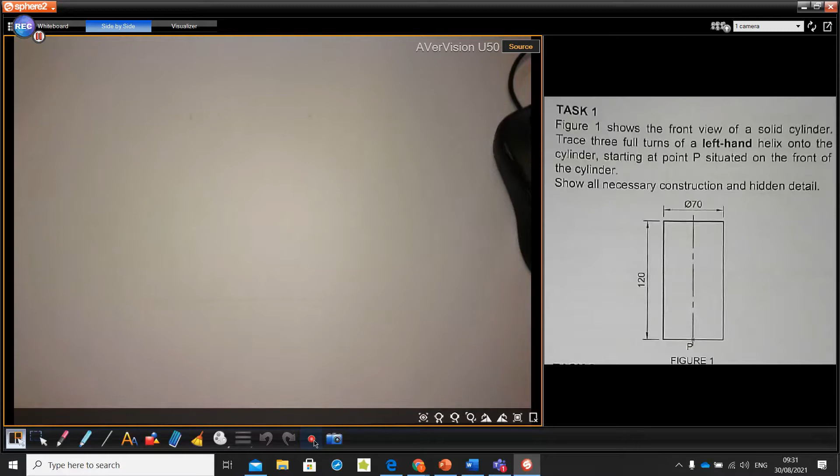Figure 1 shows the front view of a solid cylinder. Trace 3 full turns of a left-hand helix onto the cylinder, starting at point P, situated on the front of the cylinder. Show all necessary construction and hidden detail.

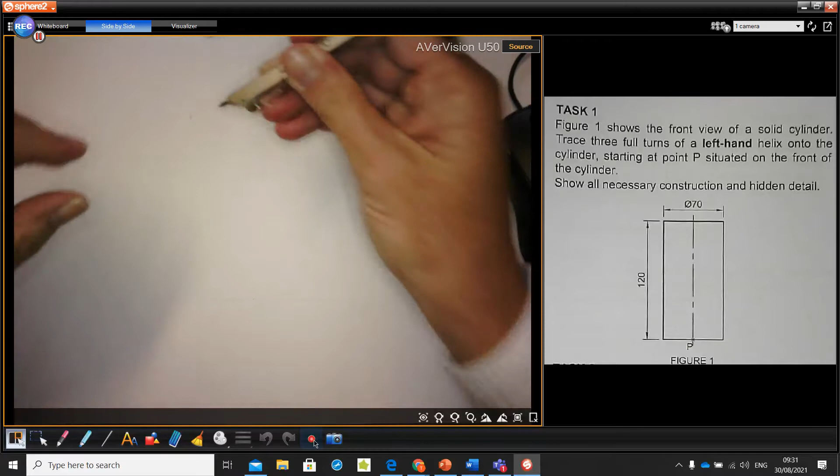The first thing you're going to do is draw the top view of your cylinder and divide it into 12 equal parts, making sure to include your center lines.

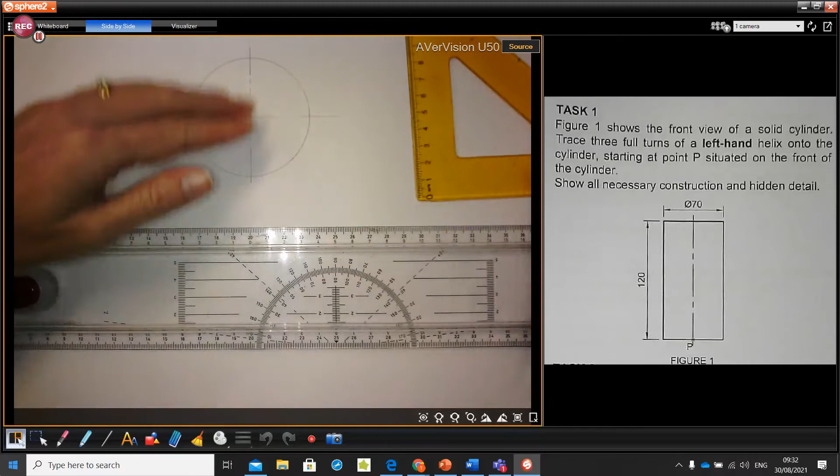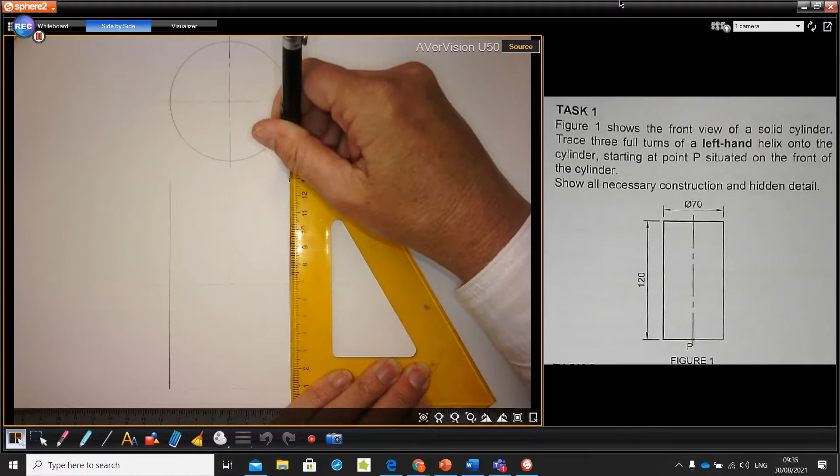Next, we draw the front view. They've given you a height of 120. This needs to be divided into 3. And then your pitch or lead would need to be divided into 12. We divide the pitch or the lead into 12 because we divide our circle into 12.

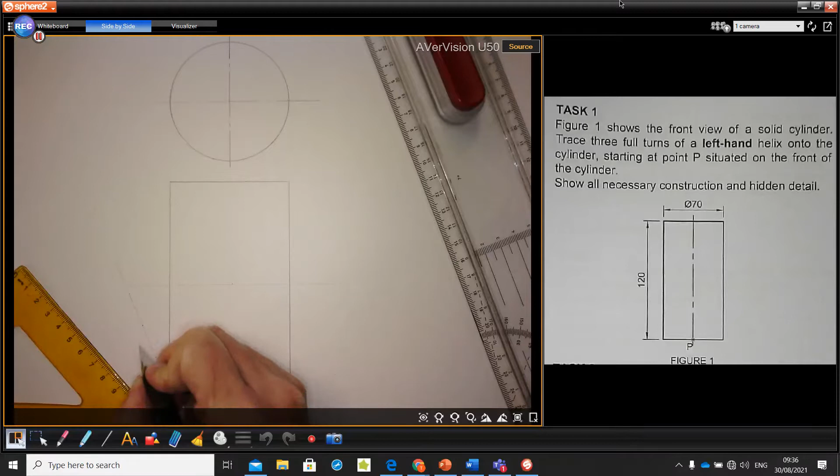So I'm going to start off by creating my 3 divisions. I'm going to be using 2, 2, and 2. This is going to give me my 3 turns. So this is going to be 1 turn, 2 turns, 3 turns. I then take another ruler, and as long as you've got 2, you could use these 2, it would be fine.

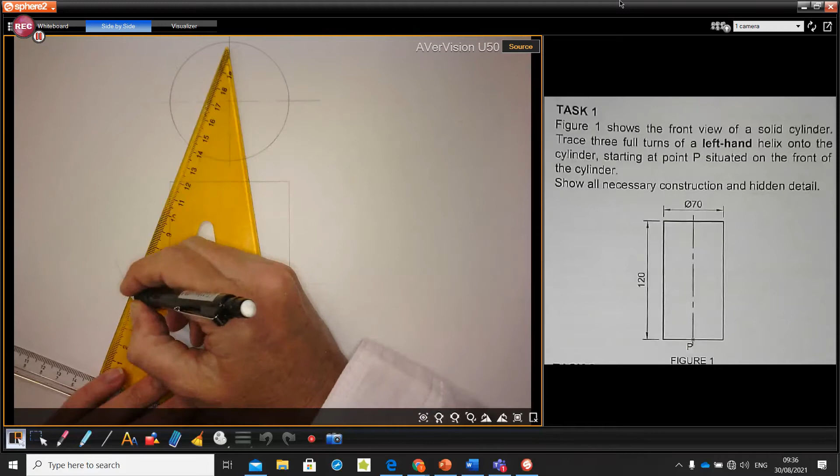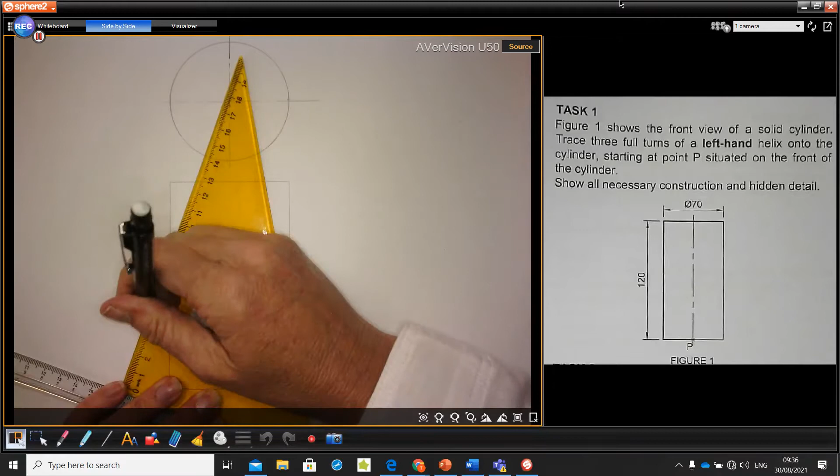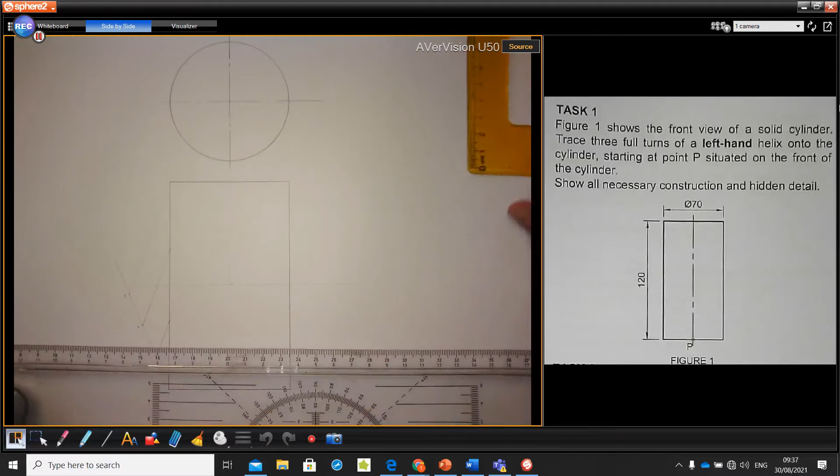And what I'm going to do is line up my 3rd point with the top of my drawing. Try and be as accurate as possible. So my 3rd division I line up with the top. I go to my 2nd turn. And this over here would be my 1st turn. Just going to make a mark a little bit darker so that you can see. You can use your calculator for this. And this is going to represent my 3 turns.

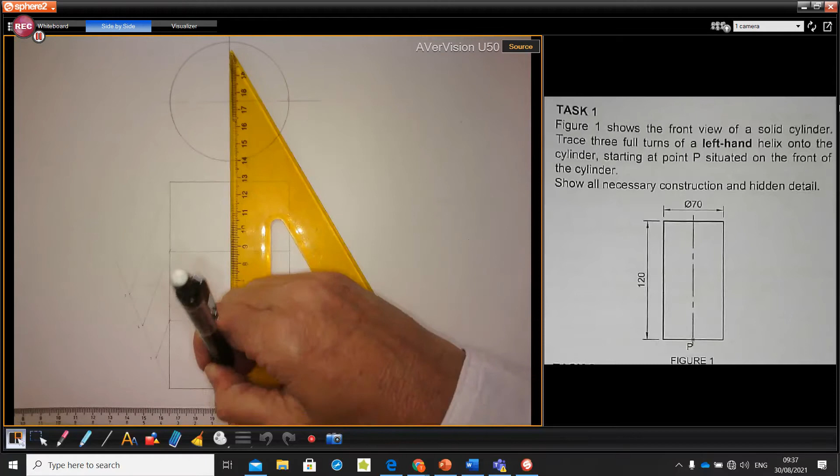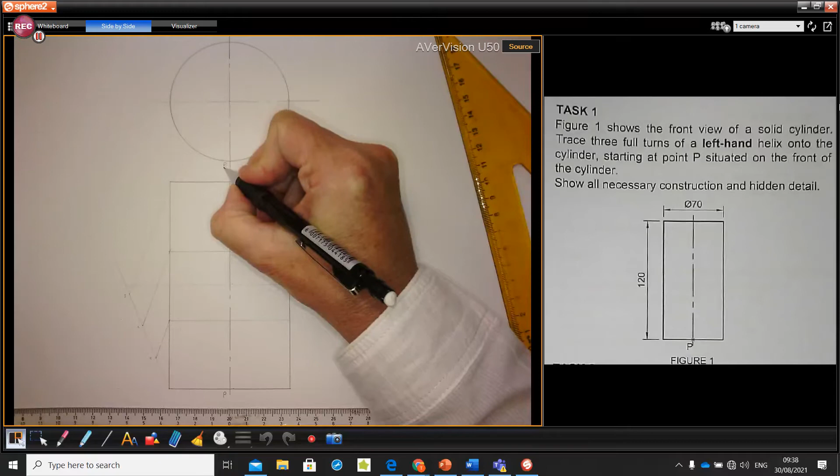Okay, we have point P in the middle, so I'm going to draw in my center line and label it. Starting at point P, they've said to you, trace 3 full turns of a left-hand helix onto the cylinder, starting at point P, situated on the front of the cylinder. So point P is going to be situated on the front of our cylinder, and it is going to go to the left.

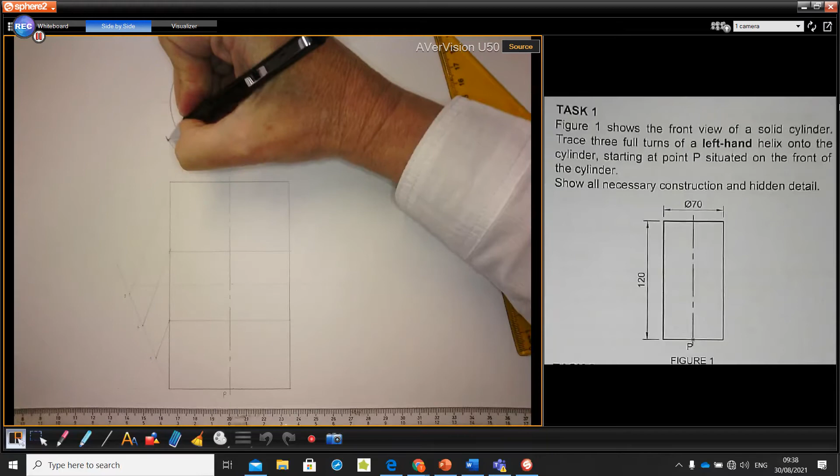It is important that you then, at this point, take your compass and show the direction that the cylinder is rotating. And you will be given a mark for this. The next division I'm going to do is divide this into 12 equal parts.

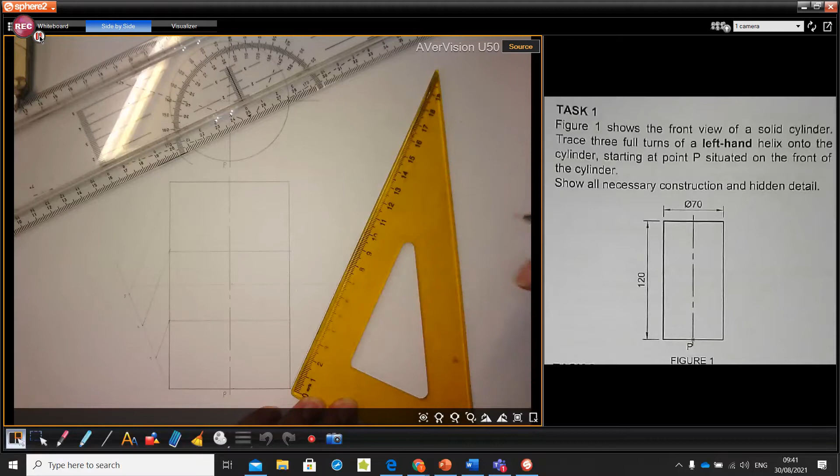Just to go over this method again, we are going to draw our 12 divisions on the right hand side here. It doesn't matter what your divisions are. If I start at 0 and mark off 12 even divisions, it's going to be a little bit too high. So I'm going to rather mark off half. So every 5 millimeters, that would give me 1, 2, 3, 4, 5, 6, 7, 8, 9, 10, 11. There's my 12th division there. So 6 centimeters up will give me my 12 divisions.

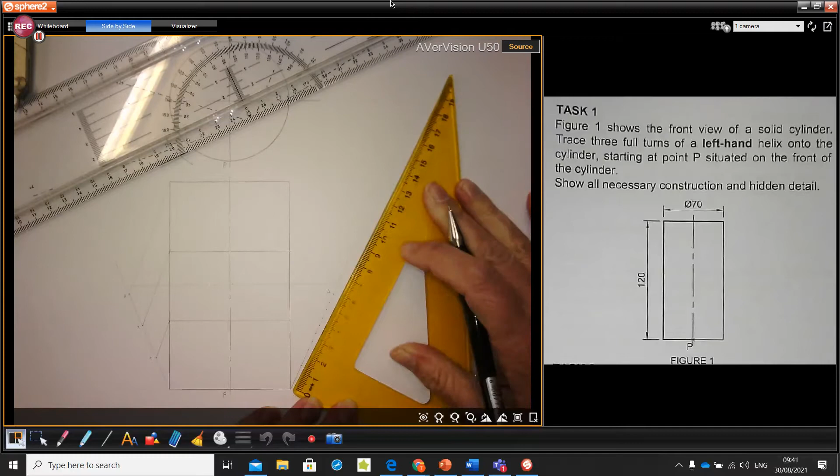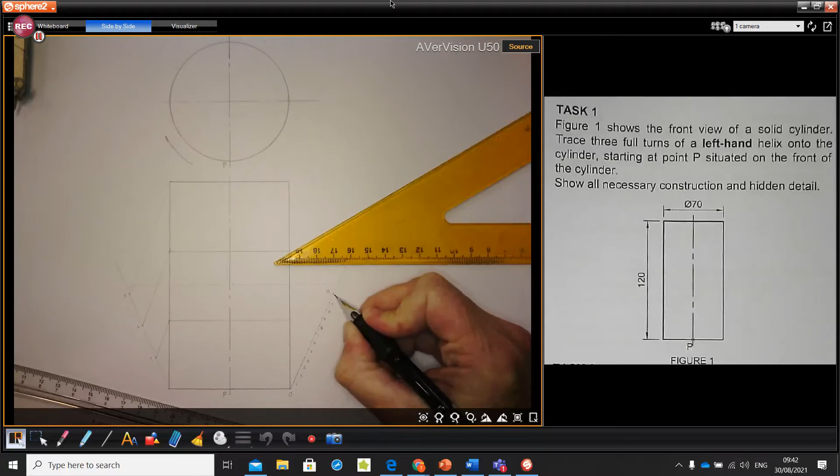I'm then going to get 2 rulers, and I need to draw parallel lines at each of these points so that each of these divisions is equal. So I line up my top with my 12th point. Remember that we start at 0 and we go up 1 through 12. So on my 12th division, let's use this angle here, I draw a line that will connect the top of my lead. And this is the part that I want to divide into 12.

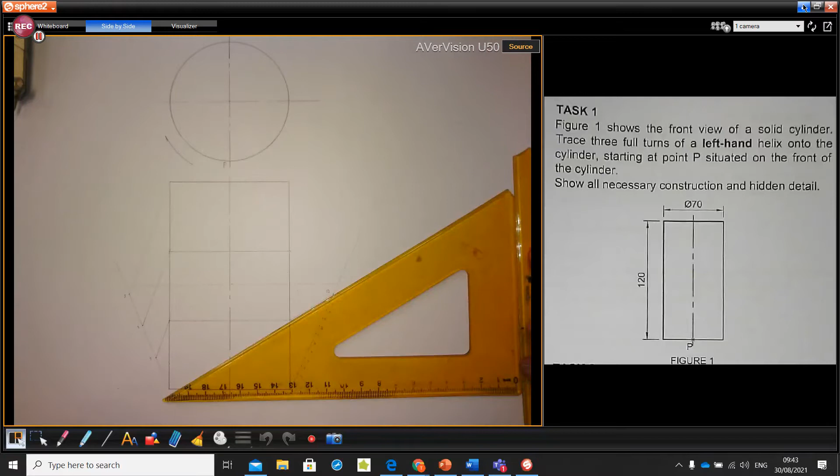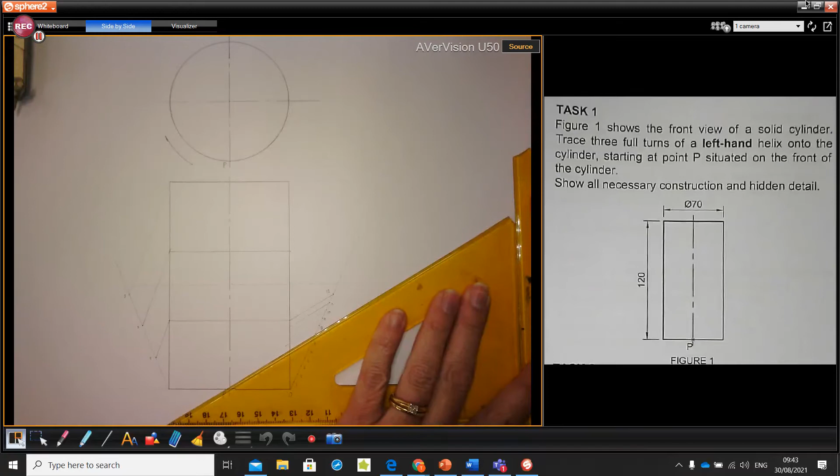So I hold this ruler down, and I take another ruler and place it underneath it. I then let this one go so that I can slide this down and draw my parallel lines. Try to be as accurate as you can. I'm extending it and drawing it a little bit dark so that hopefully you can see it in the video. Make sure that these are construction lines.

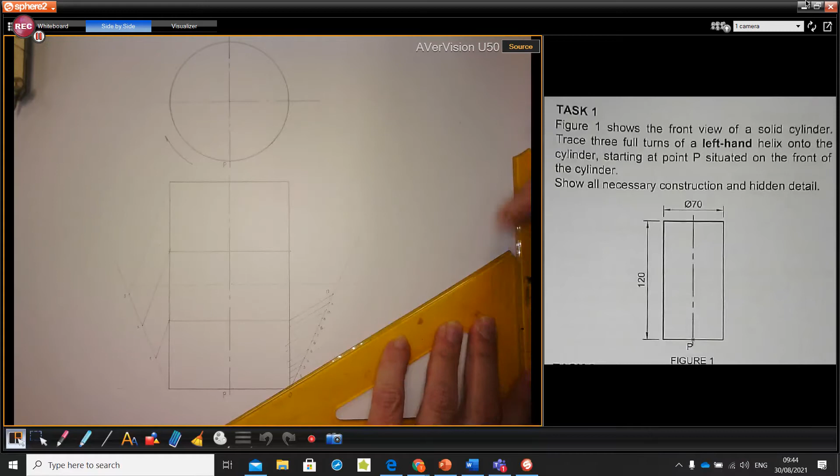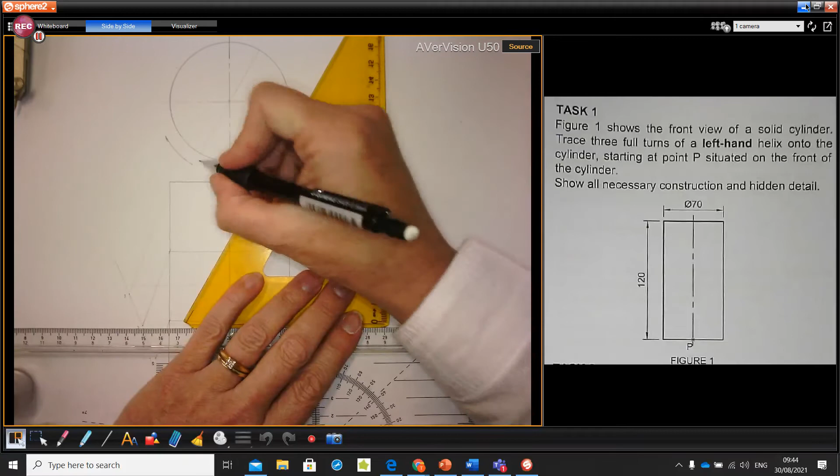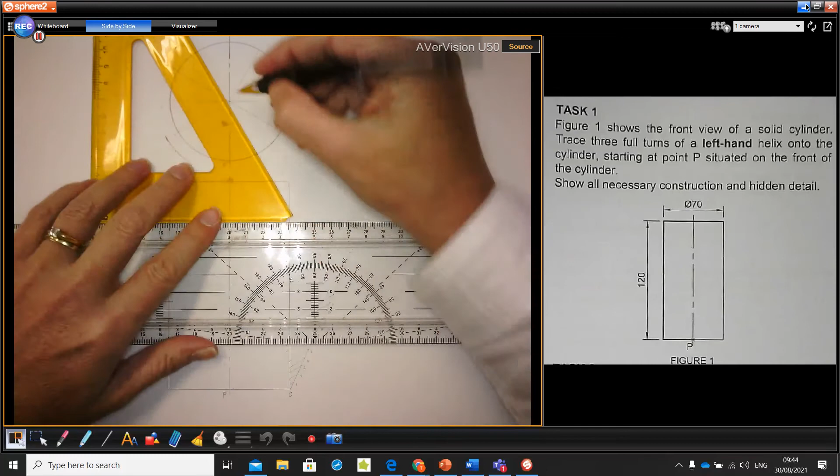What we are creating here is our 12 divisions. We are dividing our height into 12 equal parts because we divided our circle into 12 equal parts. So, because it is rotating to the left, my first point is going to be over here. So we're going from P, this over here will be 1. My next point will be 2. We'll have 3. 4, 5, 6, 7, 8, 9, 10, 11, and then 12 is going to be our join.

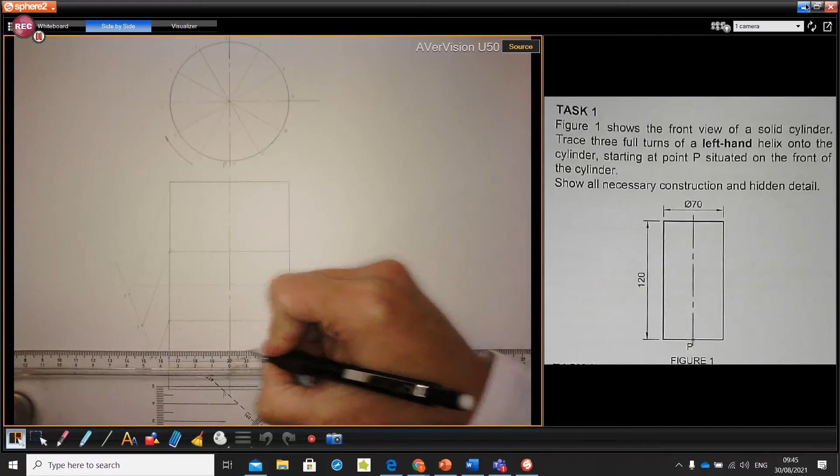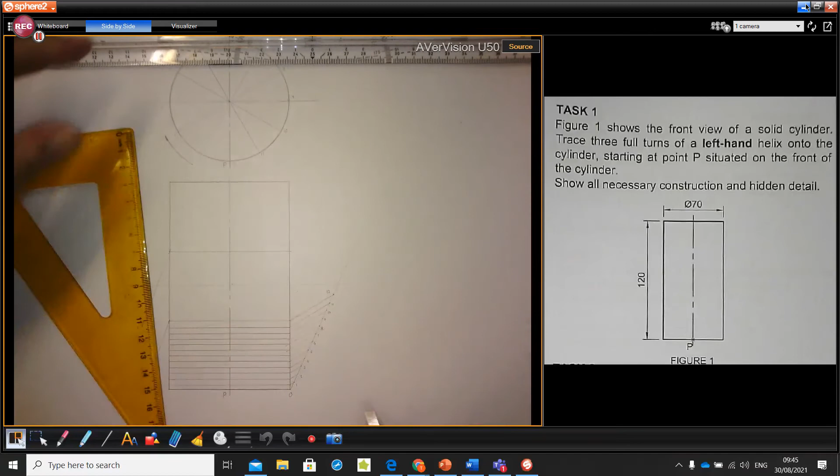So we then take these points across. All of this is very light construction lines, I'm just doing it dark so that you can see it in the video. From here, we bring our points down. And we are starting here, and we're going to go 1 up, 1 across. That would be my first point.

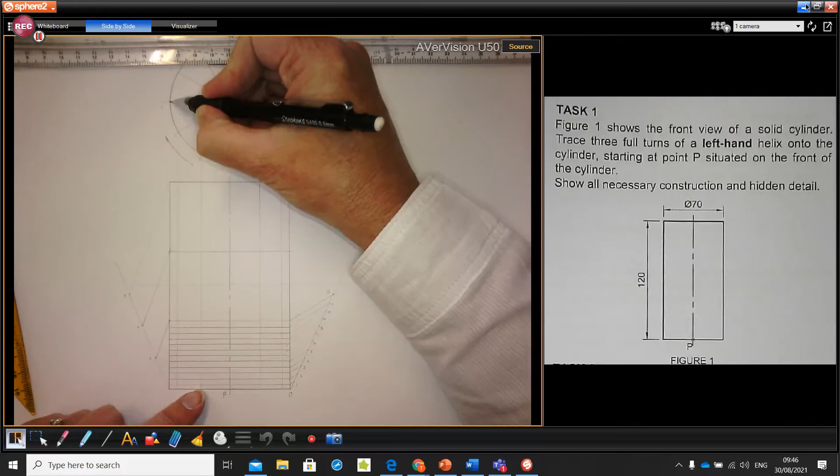Coming around the front of the object, I'm going to see it up until point 3, and once it goes beyond point 3, or on this side point 9, anything that is behind my object I am going to see in hidden detail, and anything in the front is going to be seen. So I'm going to see my curve 1 up, 1 across, 1 up, 1 across, 1 up, 1 across. At this point, it is now going to be hidden detail going around the back.

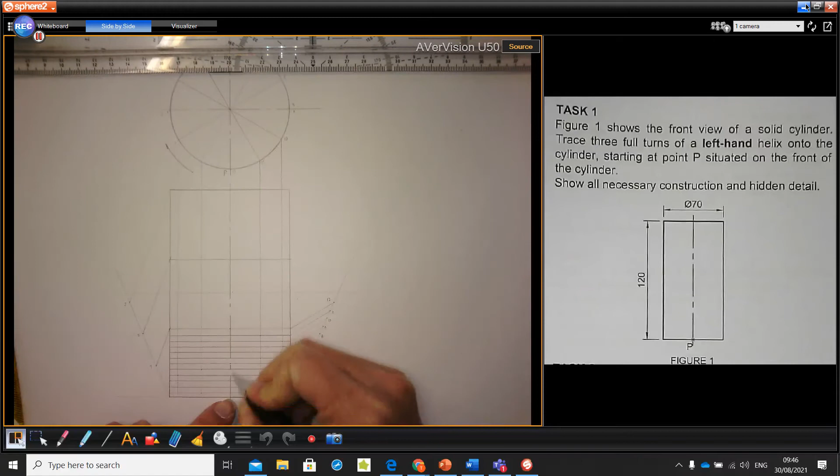It is halfway, 1 up, 1 across, 1 up, 1 across, 1 up, 1 across. And from here, I'm now going to see my curve. 1 up, 1 across, 1 up, 1 across. And it will end up, after one revolution, in the same point. The next thing you need to do is to line up 3 points at a time to get your curve.

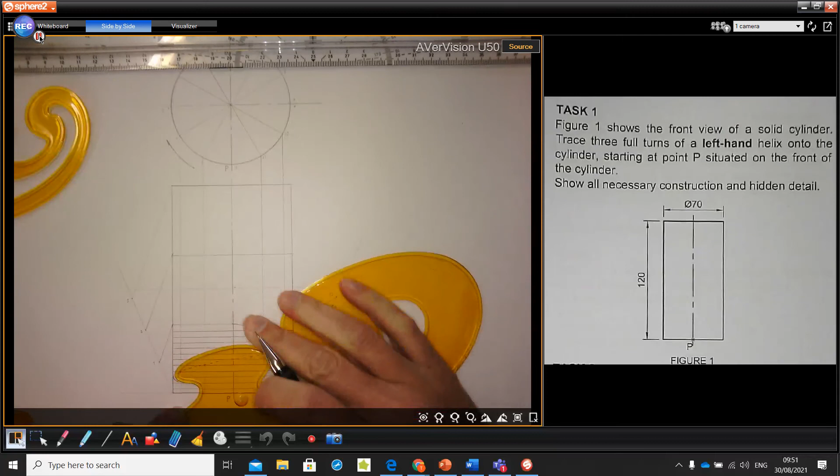And there you have your helix. This process is repeated over the next 3 points, and that is how you will complete task number 1.